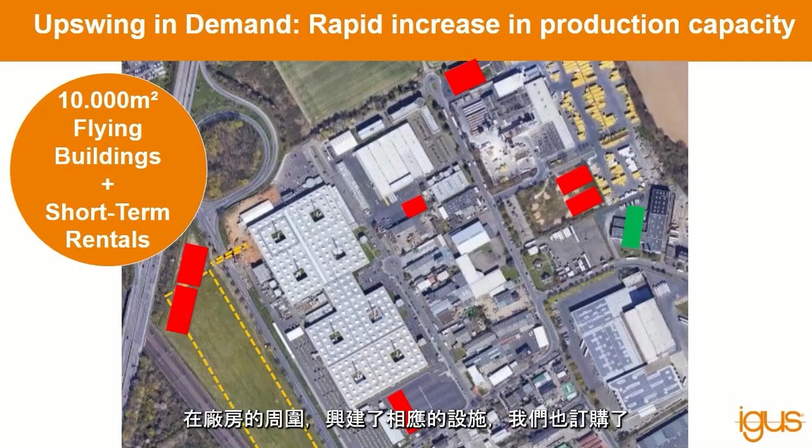We are experiencing a boom time right now, and we are ramping up our production capacities by 50%. We are building, as we speak, this new factory with 24,000 square meters. We are renting, in the meantime, rental facilities all around our building. We are pitching flying buildings to cope with it. We have ordered 330 injection molding machines, and almost 100 are running already.

We also increased our stocks towards the end of last year, which helped us immediately to deal with the quick demand. We hired more than 250 associates in our plants in Germany, and we have a plan to hire 220 more, and improved our training.

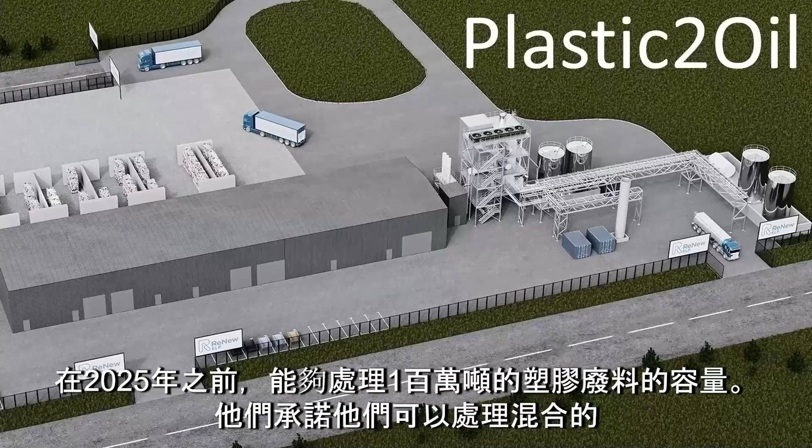And Mura now has the plan to ramp up the capacity to 1 million tons of plastic waste by the end of 2025. They promise they can take mixed plastic waste and turn it back into oil, naphtha, and other precious chemicals. The first installation is under construction now in England, and we are happy that we were present at the birth, and let's hope that this technology works on a large scale.

The second example, going from large global to very small. As you're probably aware, we have this apprentice system in Germany, young apprentices, and we thought, what is the best way that apprentices can learn? And the best way is that they run a company. So we gave them the chance to run a company, and they selected their own product.

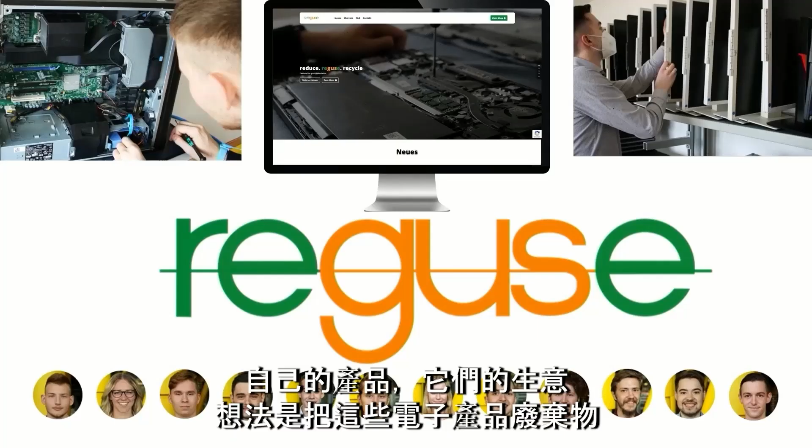Their business idea is to take electric and electronic waste from igus, refurbish it, and sell it online to igus associates and their families. They are refurbishing used laptops, monitors, keyboards, projectors, copiers, etc. They started online April 1st.

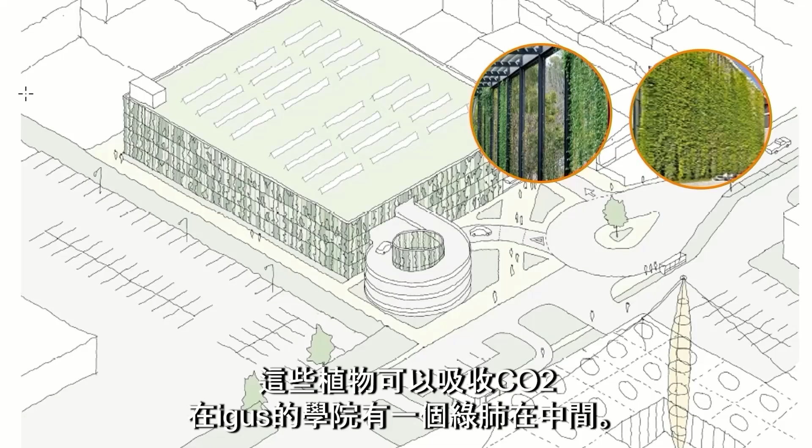The third example is that we are on track to measure and monitor our own CO2 footprint for our buildings, facilities, production, and products. Our goal is to be climate neutral with our buildings and production by 2025. One example is a parking garage we are planning on campus, with green planted facades to absorb CO2 and create a green lung in the middle of the igus campus, maybe with solar panels or gardens on the roof, also for company and customer events.

These are some of the initiatives we are taking. We do think plastic is a precious material. There's a young organization in the Netherlands called Precious Plastics, and we agree, if we do the circular thing right. There are still problems to be solved, such as microabrasion and fossil fuel dependencies. We are aware of that, and our suppliers and we are researching it.

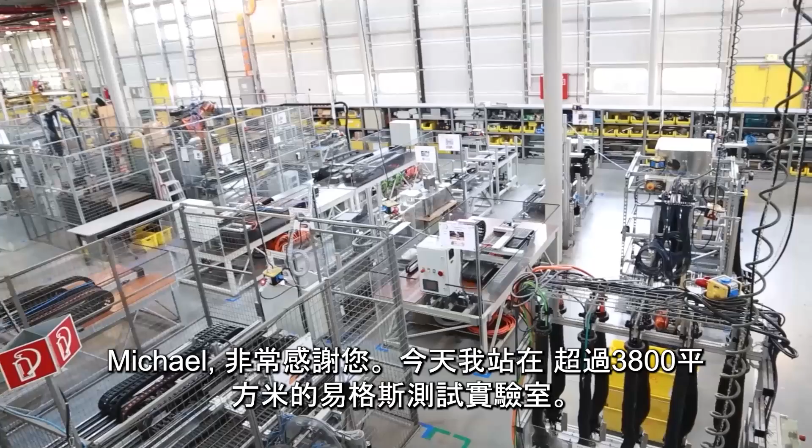Michael, thank you very much. Today I'm standing in the igus laboratory. With more than 3,800 square meters, we are doing more than 2 billion test cycles a year with chainflex cables and echains. And today I'm glad to present our newest investment, our laboratory for cleanroom tests.

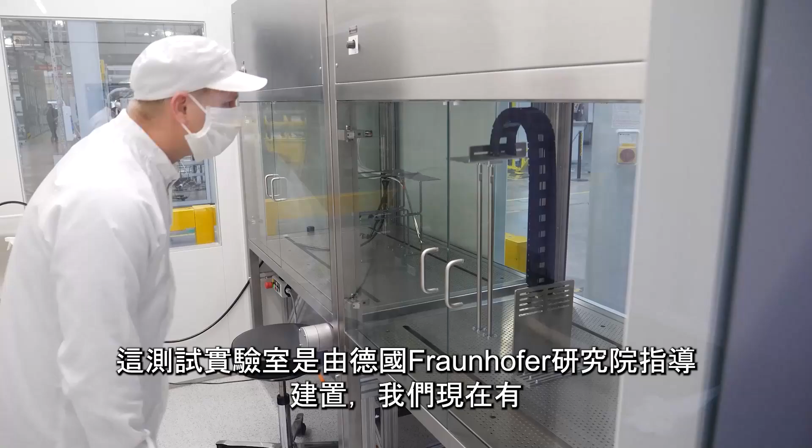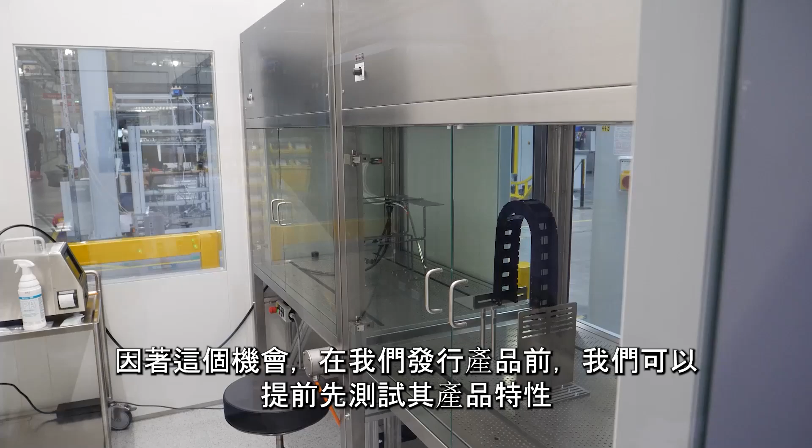This was built up with support from the Fraunhofer Institute Germany, and we now have the opportunity to do cleanroom tests according to ISO Class 1 with chainflex cables and echains. With this, we can test products before launching them into the market, and of course Fraunhofer Institute does the final testing. We want to present all the news we've tested in our laboratory at our booth. Michael, could you take over, please?

Okay, Rainer, thank you very much. Clean room, a very good keyword for Jörg. He will show us the complete new echain family E6 for the semiconductor and electronic industry. Jörg, please. Hello and welcome from my side as well.

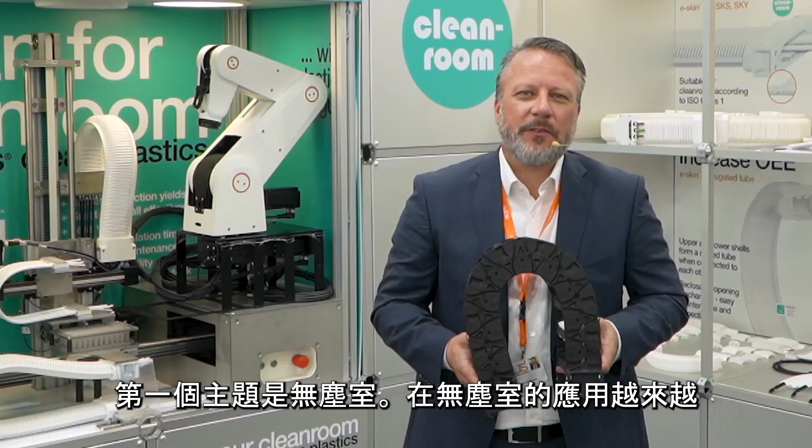The first topic is clean room. Applications in the clean room sector are becoming more and more demanding. The main markets are in Asia, in PCB assembly, medical technology, as well as display production. The demands on production for the clean room are always becoming greater: minimum particles, minimum contamination, and maximum service life with high dynamic values must be realized safely.

In order to be prepared for the future, we have developed a new cleanroom product, the C6 echain. C stands for clean, 6 for a 6-piece chain link. What makes the new C6 cleanroom chain stand out?

In the run-up to development, we took a close look at all the technical details of the previous series, E6 and E6.1, and optimized and redesigned them to new standards for cleanroom applications. The C6 has new bending connectors with better damping properties, less abrasion, and more lateral stability. Furthermore, we managed to design the side panels so that there is only a small gap between each other.

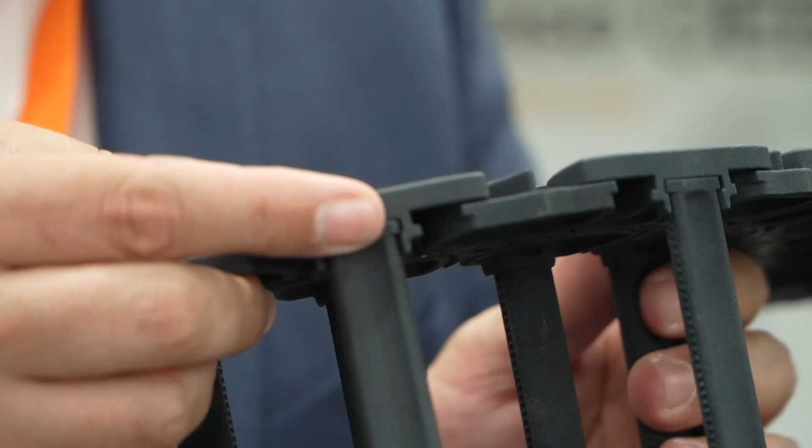This reduces the abrasion of the particles during operation to almost zero. In the outer area, we have integrated dampers which ensure low vibration, quiet operation, and reduce particle emissions. All components that come into contact with cables have been newly developed from tribo-optimized material, CR1.

With its abrasion-optimized design, the new C6 cleanroom echain is aiming for ISO class 1. The applications are medium travels with a high degree of filling inside.

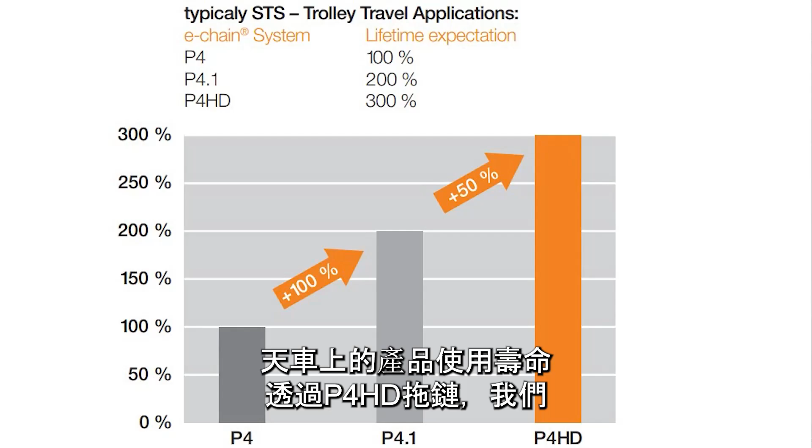Compared with the previous series P4 and P4.1, we doubled the service life and the availability of cranes, and now with the P4 HD we increase this lifetime again by 50%. This enables us to meet the demand of a service life of up to 15 years. We have achieved this with the following design improvements: new pin bore connections, even more abrasion-resistant materials,

a three-way stop system combined with a new symmetric design, optimized rollers, and a new autoglide crossbar. The chain is like a modular system. It is possible to quickly replace components without disassembling the chain.

Of course, the chain can also be used for other applications such as gantry handlings, whenever there is a combination of extremely high acceleration and long travels.

If desired, the chain can be equipped with our iSense modules for predictive maintenance service, live calculation, and other safety functions, making it easy for operators to monitor the chain online. Richard Habering will show you later more possible applications and solutions with smart plastics. Okay, I hand over again to Jörg.

He will show you now the world innovation TRX system for the robotic industry. Now, a world first for robotics.

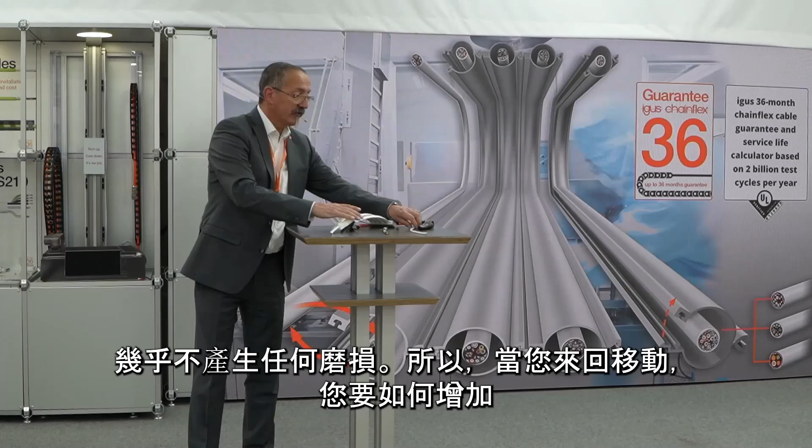When you're moving back and forth, how could they increase the speed of the application? When moving fast back and forth, there's always some force from the cables against this movement, and when you're bending the cable there's some force again. So we developed this chainflex clean family with a clear target.

One target is to reduce the size of the cable. If you look at a normal control or motor cable from igus for a normal e-chain application, you see the outer jacket and assembly shield. In the case of chainflex clean, we don't use any jacket anymore.

With the following clear benefits: we're able to reduce the weight by 21% and reduce the size by 18%. But the main benefit of this taped assembly of chainflex clean is that we have absolutely no force against its flexing, compared to jacketed cables.

With this benefit, tested with more than 50 million cycles for a bending radius of 70 millimeters, we have the full range of cables: control cable, bus cable, and motor cables. And, unique in the market, with a 36 month chainflex guarantee and UL verification.

I hope these news of chainflex and readychain were interesting for you, and I'm handing over to Richard for smartplastics.

Thank you very much. Let's talk about Industry 4.0, condition monitoring, Internet of Things, cloud computing, predictive maintenance, artificial intelligence, machine learning, 5G, edge computing. And in real life? What is the guy with the helmet thinking about that?

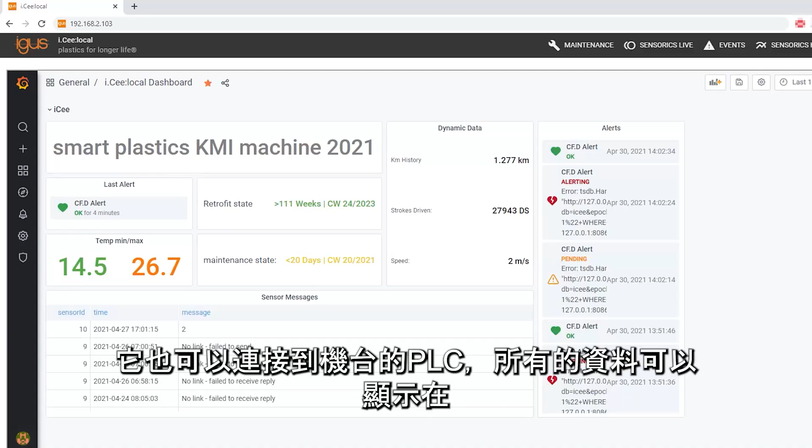It is possible to connect it with the PLC of the machine, so all the information can be given on the machine's monitor, and it can be connected with cloud computing services, MES, SCADA services, whatever. So the connectivity is no problem. We would like to say, yes, we can, if the question comes up, is it possible to connect to? So all these things reduce downtime, reduce stress, save money.

As we said, we did it for chains for more than 10 years now, and also for the bearings, solutions are available. But this is not my part. This you will hear a little bit later.

Thanks for your attention. Okay, new as well, we have the iSense 80mm size bearing new in the program for predictive maintenance, and it's especially for heavy duty applications. But what I want to present you today is the new and the second wrapped bearing, TX2, a special bearing for heavy duty applications. It is able to take loads up to 400 Newton per millimeter square, so it's a very heavy duty material.

And we have a standard program from 20 to 80 millimeter standard diameter, but it is possible to produce bearings up to 2.8 meters, so very, very big size. But the biggest advantage is the wear resistance. The wear resistance in pulsating applications is up to 3.5 times better than the TX1 we have in our program. So it's a very good solution for heavy duty applications.

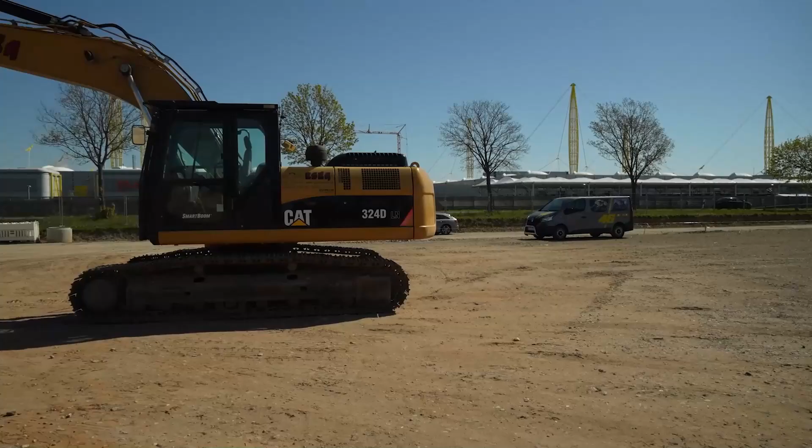But now I will show you a little bit more live from our construction field outside, very close to the igus factory. And now here from the construction site of igus, I want to explain to you why it makes sense to use maintenance-free bearings in all kinds of machines which need lubricated bearings for now.

There are three reasons. One is you save a lot of time for the maintaining of all these applications, and you reduce the downtime. Second, you save money because it's not necessary to put grease in the applications. For example, such a medium-sized construction machine needs 50 to 60 liters of grease every year.

And the third argument is that we save a lot of grease and oil which comes into our environment. Statistics say up to 27 million tons per year come into our environment. So these three arguments are not only good for the machines and for time and for money, they're also very, very good for our environment. A big step into an oil-free world. And the next news is for the food and beverage industry, our AX500.

And now from our industry and application corner, we go to the exhibition, the IMPS, the igus motionplastics show, and I want to explain to you more about the new AX500 here on this display. Yes, the new AX500 material, a new high performance material, with EU 10/2011 conformity and in combination ESD conformity.

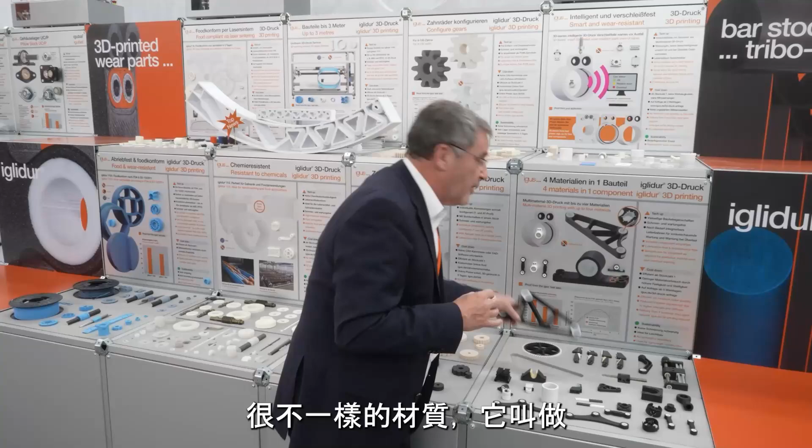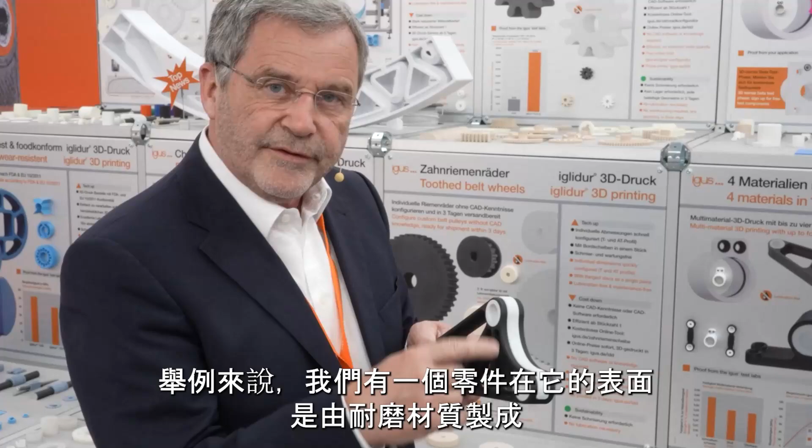Yes, that is indeed the very fast service, 3D printing, and different new materials. We developed a very interesting service for our customers. It's called the 4-key service, meaning that we are able to print from 4 different materials in just one piece. For instance, we have a surface made from a wear-resistant material. In the outer, we have a housing material with a very

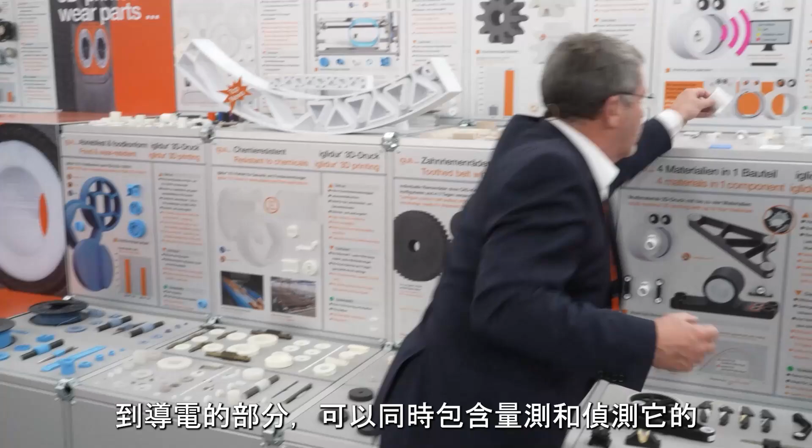strong hardness. And we can combine that with conductive parts, which are able to take a sensor in and measure and detect the wear or the loads on the bearing. And the last one, the fourth material, could be, for instance, a seal on the end of the bearing to keep dust and dirt out.

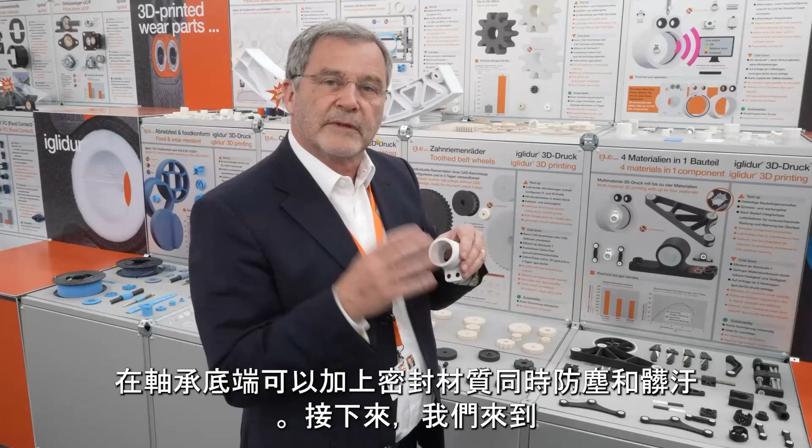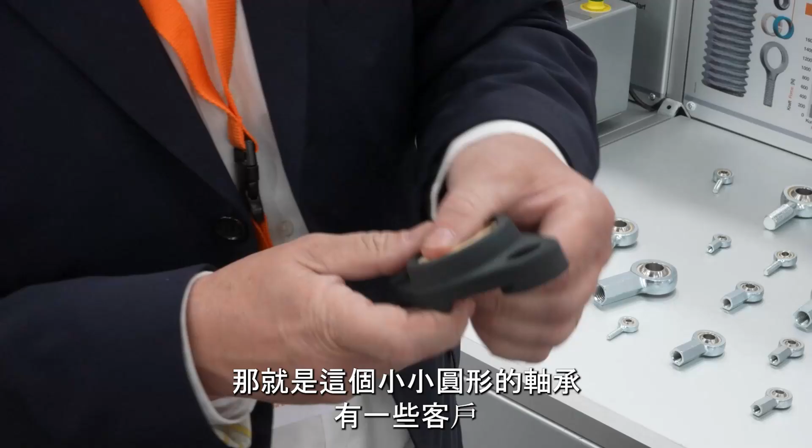Now we come over to the igubal parts, where we introduced a very interesting program of bearing inserts. That is these small round bearings in a spherical way. And some of our customers asked us also to make and offer the housings for these kinds of bearings. And it is clear for the reasons, because also the housings, when they are made from steel, will rust and have corrosion. Especially on the inside, that is a problem.

And so we developed a series of different housings, like these pedestal or flange bushings. In the last months, in the xiros department, we have made lots of very intensive tests to demonstrate how the material of the cage and the material of the outer and inner rings and the balls work together.

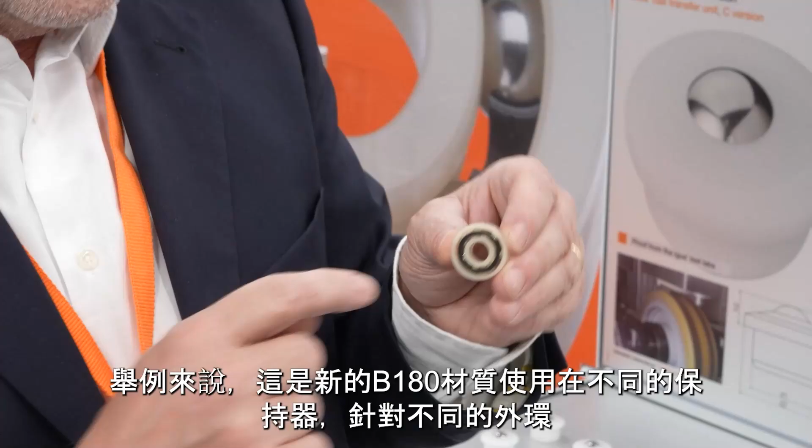And we found out and are finding out that the right combination will increase the lifetime of ball bearings by a very high factor. For instance, this is the new one, B180, which is using a different cage material to the outer and inner ring.

Very interesting, even for the Asian market, with all these electrical and electronic devices, we developed a new tribotape with ESD features. That means it is a conductive material that can be used with the glue on the outside or without the glue, and can be used in machines which have to handle electronic devices or components to keep them safe.

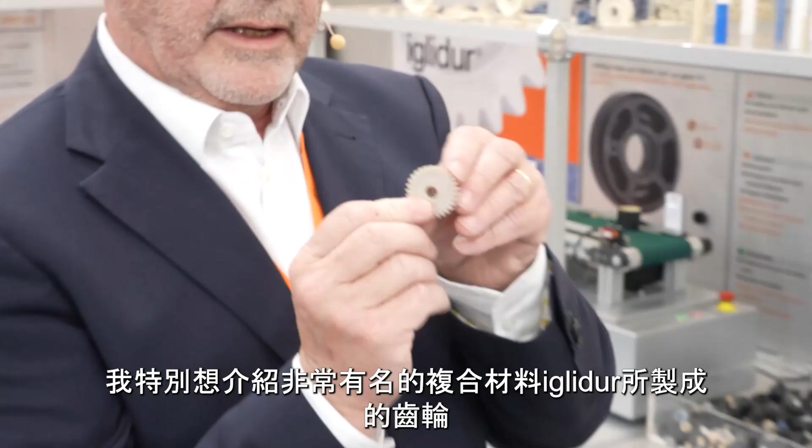And our last product I want to introduce to you is our gears. Gears made from plastic, and of course wear-resistant and lubrication-free gears. And what I want to introduce especially is gears made from our very well-known iglidur A500. Iglidur A500 is a high-temperature material with an FDA approval and with an extremely high chemical resistance.

Customers can buy standard types, or they can ask for very special parts which can be offered by igus made from iglidur A500. And gears are a very interesting product for my next colleague, Stefan Niermann, who is looking for these gears in his techniques.

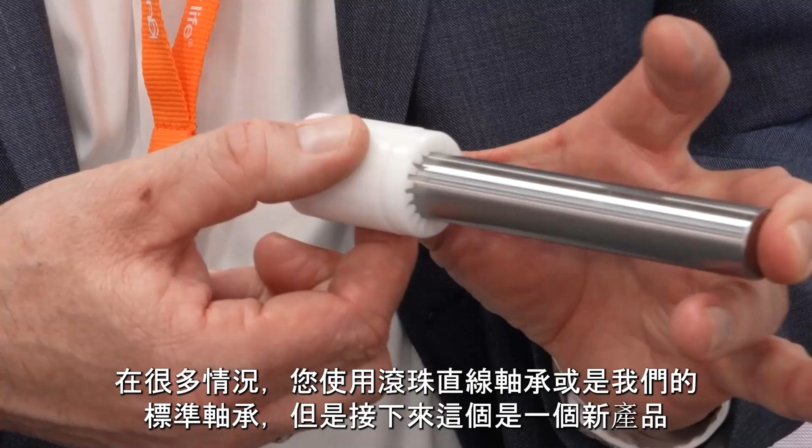Thank you, Gerhard, and welcome to the world of drylin, linear and drive technology. Linear technology, you move something from A to B on a direct way. In many cases, you use ball bearings or our standard bearings, but this one is a new and special one. This is made from 100% FDA compliant material. It's called A180, and the special thing of FDA, you can put it in direct contact with food.

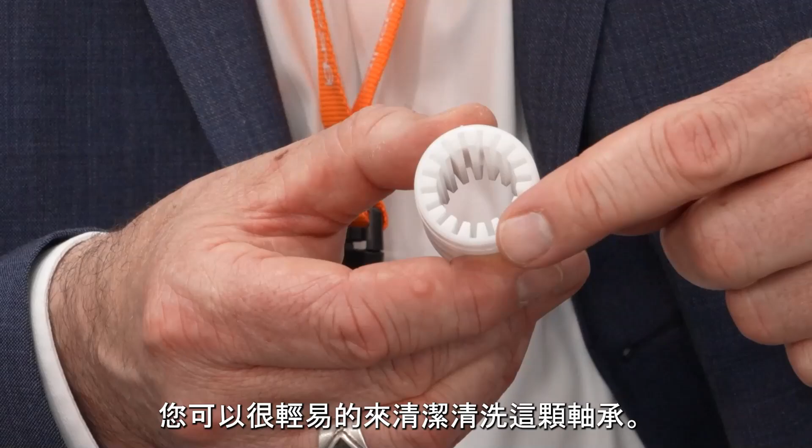And that gives us a new chance to sell this nice product to the food industry, but also to the medical industry, for example. And another nice feature of this bearing is you see the big grooves inside. You can really wash down these bearings very easily.

Another new product that was made for the linear market is the PS series. This one is made for high precision applications. High precision in our case means 20 microns of tolerance range. At the end you can reach 50% better play at the working point, because this is really molded very precisely, and it's also very stiff because of the small wall thickness and the material we use, W3600, with a high compressive strength.

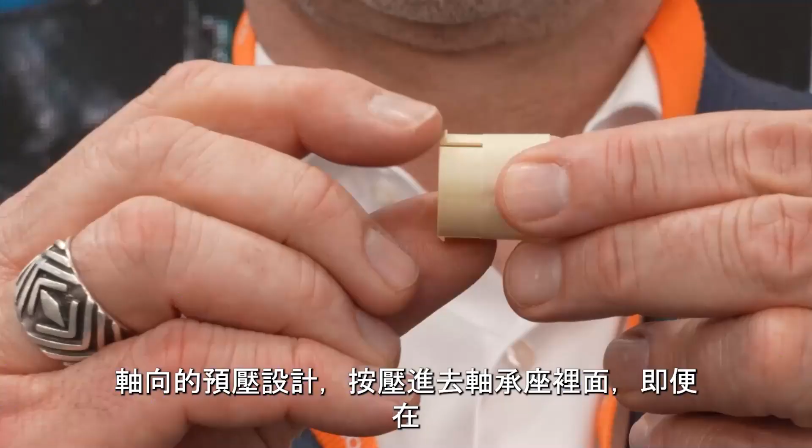And both together, thin wall and high compressive strength in a bearing like this, you can fix it, and you see that this axial, preloaded axial snapper gets into a groove inside of the housing, and so even for high temperature or high loads, you cannot lose the plastic out of the housing.

Yeah, specially made for applications where you need high precision, for example in medical or optical industry, like you see here, but also for some simple format adjustments where high precision is needed. So we talk about 20 microns. Maybe it's interesting for you.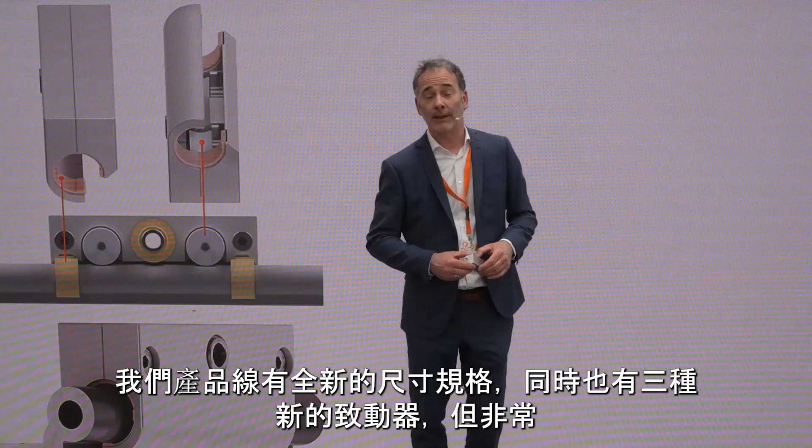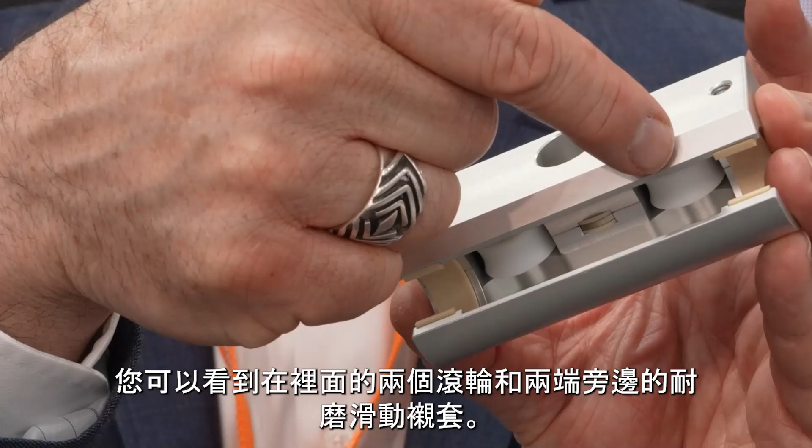Maybe you know our drylin W linear toolkit based on rails like this. We have a new size in our product range and also 3 new linear actuators, but the very special thing is our new roller bearing. Look at this bearing. You see 2 rollers inside and some sliding elements on the back. Where is it made for?

We are often asked for high load applications, and our rollers are not big enough, so we double the rollers now and can take double the load, or maybe reach double the lifetime. But if you have different rollers in a row or in line, then you have to make sure that all the rollers can take the load. And this is a special thing.

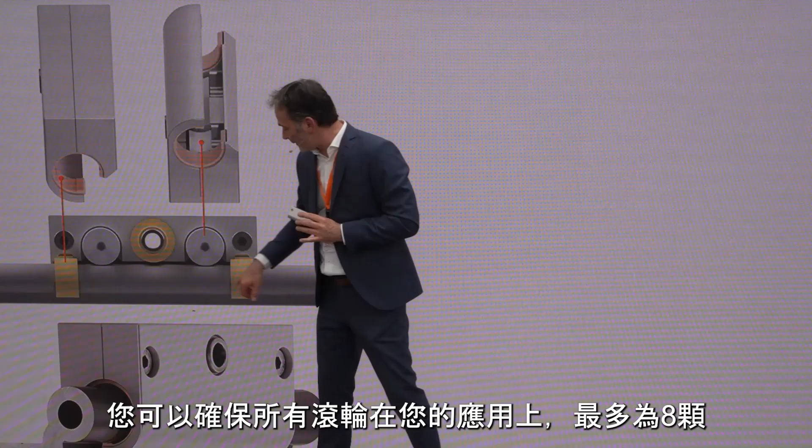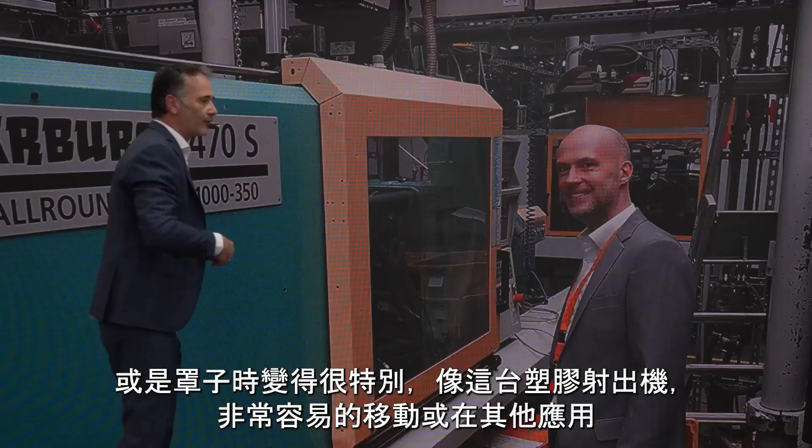You fix the housing here. You can see it here. You fix it here, and it can go like this, and you have a guarantee that all rollers that are in your application, maximum 8, can take the load. And that makes it really special for applications where you have to move big doors or shelters for machines, like here on a molding machine, very easy.

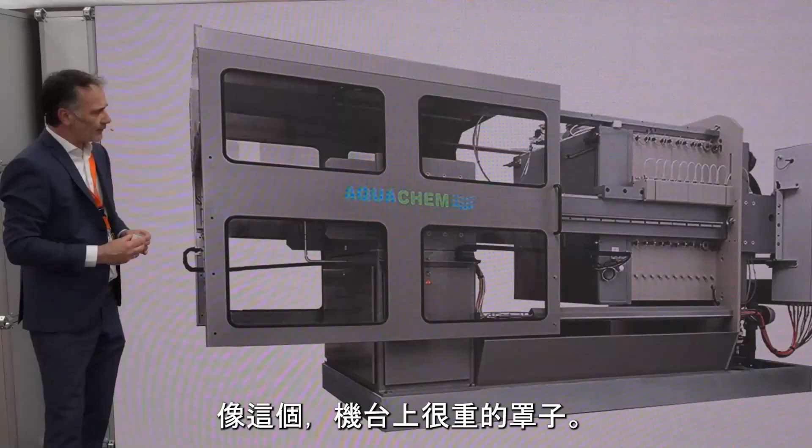Or in other applications like this one, a very heavy cover of a machine. This bearing can take 100 kilograms. So together 4 bearings can take 400 kilograms, and you cannot lose the bearing from the rail.

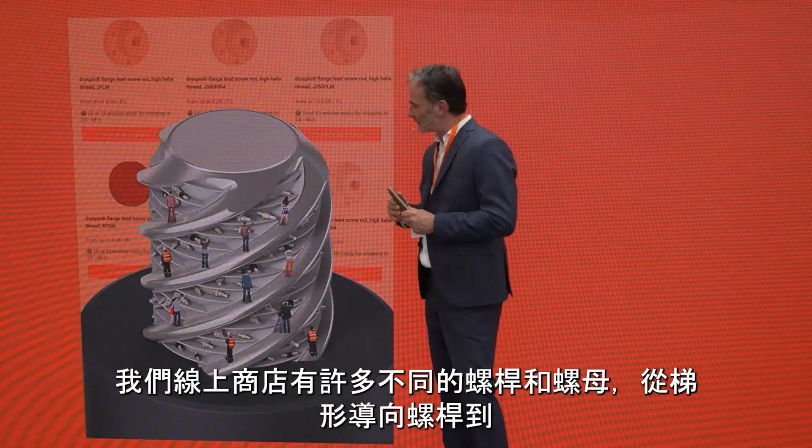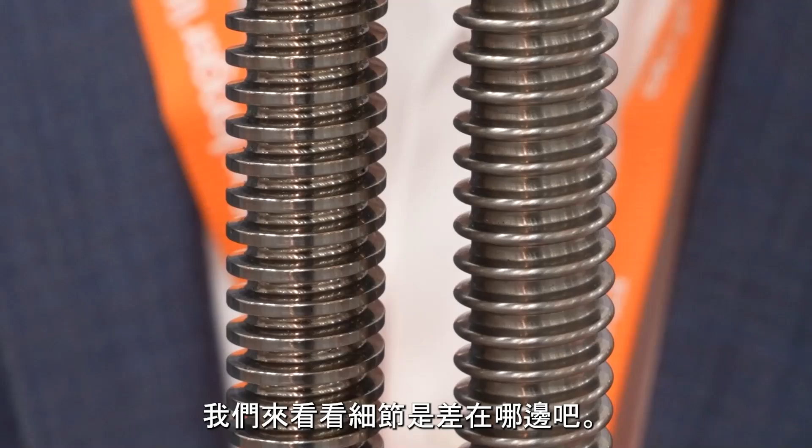Let's enter the world of our dryspin lead screw drives, or better, let's enter our dryspin shop. We have lots of different lead screws and nuts in our online shop, from trapezoidal to high helix and so on. And now we have something new, and these both look similar, but there's a big difference, and see what the difference is in detail.

The DIN, the German industry standard, has defined trapezoidal lead screws for more than 100 years, and it always works well, especially with metal nuts. We are working with plastic nuts, so we thought about putting some knowledge into the lead screws and changed the German industry standard a little bit. And let's have a look at the metamorphosis of this lead screw.

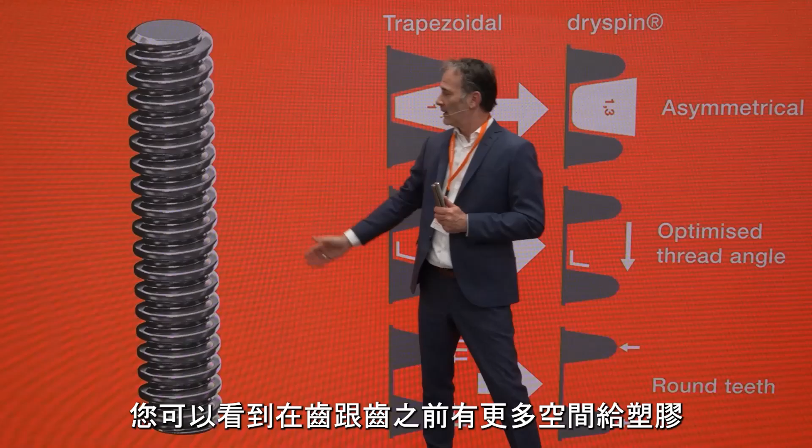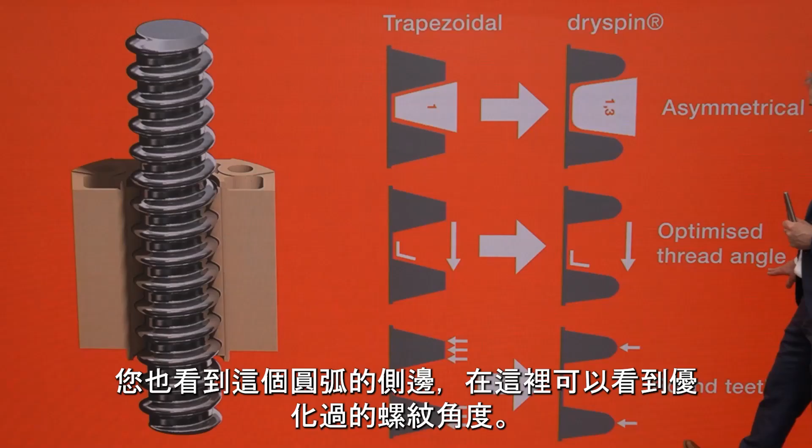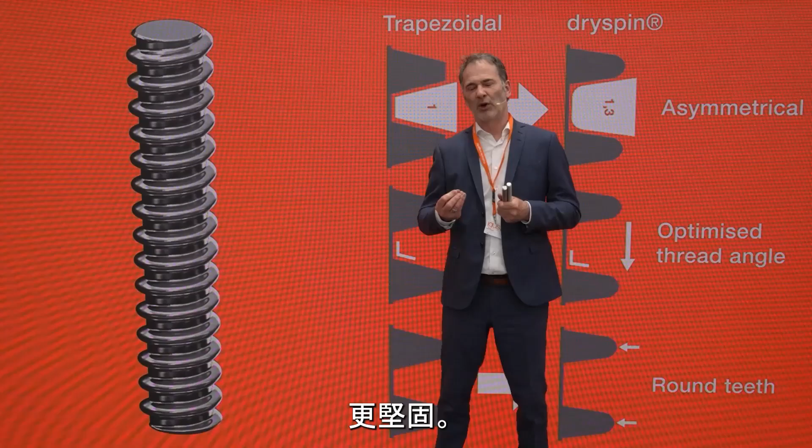And you can see that you have more place for the plastic between the teeth. You also have rounded flanks, and you can see it here, an optimized thread angle too. At the end you also have a bigger core inside, and this makes this lead screw more stable and more solid. And what is the advantage for the customer and for you?

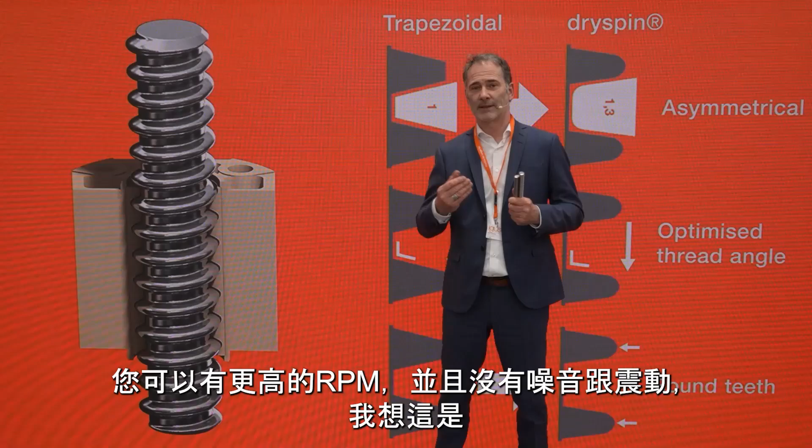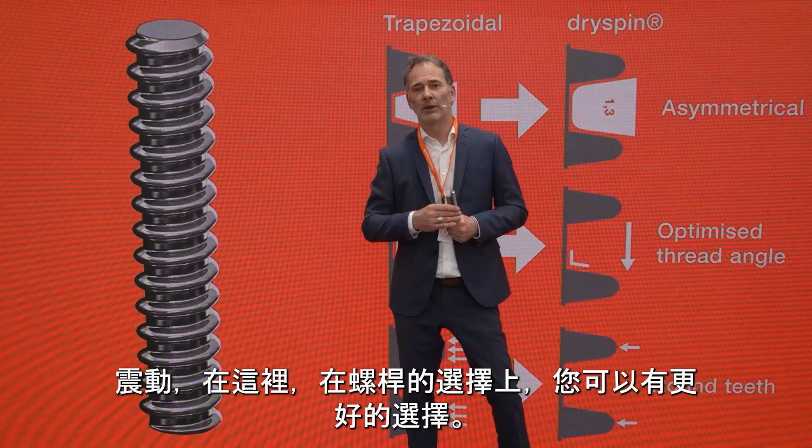You can run with higher RPM without getting noise or vibrations. And I think this is something that everybody knows. Trapezoidal lead screws like to make some noise, like to make vibrations, and here you can get a better result with the new lead screws. Cost down, tech up, for example, for 3D printers, for medical industry, optical industry, but also some simple format adjustments.

We are now leaving the world of motion in plastic and step into the world of electronics. And we have a lot of drive controls and motors, especially to drive our linear actuators. And especially for stepper motors, we now have a very cost-effective new driver.

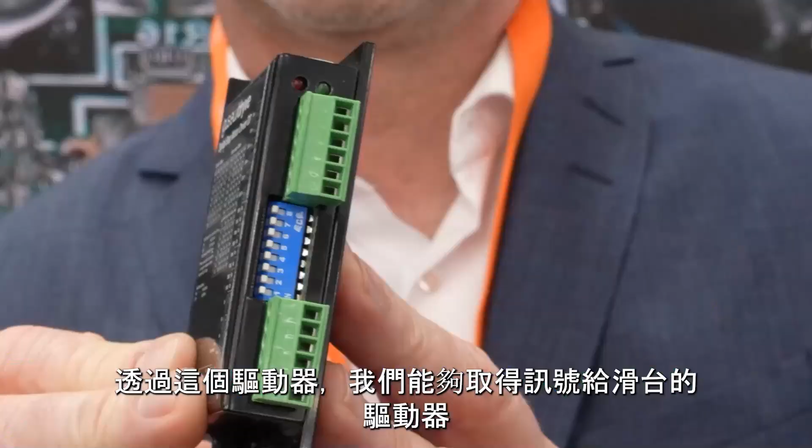And with this driver, we enable you to get signals to the linear actuator or to the motor very easily by Beckhoff or by Siemens, or even with the Arduino board or Raspberry Pi. That makes this cost-effective, and applications like open the door, close the door are really easy to realize. And for more stuff like automation and electronics, I pass over to Alex.

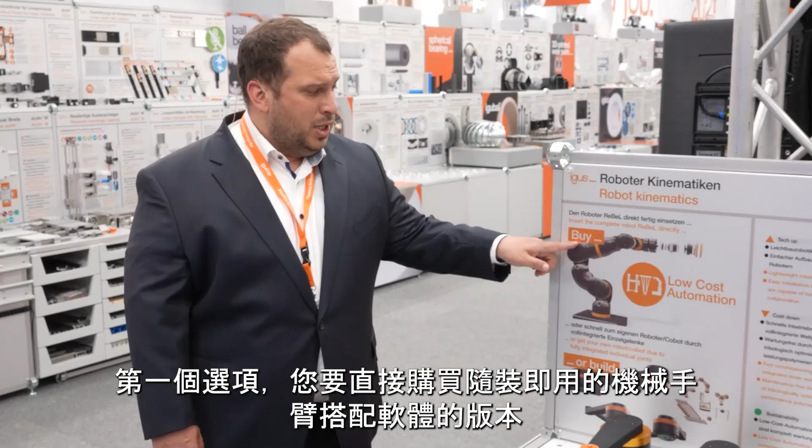We will come to the news, the ReBeL fully integrated wave gear and the ReBeL cobot. All our products always have two entry ideas. The one idea is buy a directly ready-to-use, plug and play version of a robot with software, with everything inside, so that you can directly start.

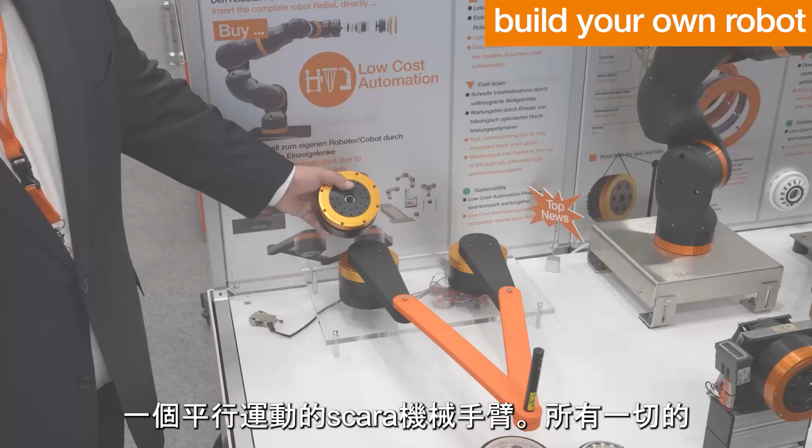And everything is driven by the CAN bus, a motor controller and BLDC, which is already fully integrated inside the wave gear. Here you can see the contrast, the variant of the ReBeL parts, the ReBeL articulated arm cobot. We think the lightest one in the world with under 10 kilograms weight, and from little quantities to have for 3,000 euros.

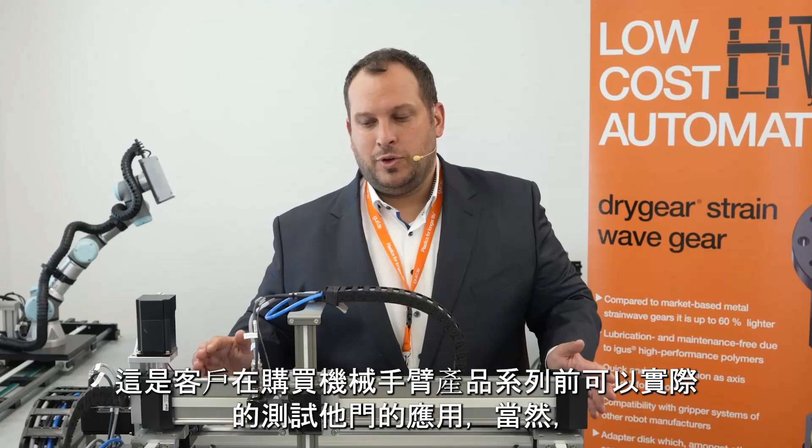Hello and welcome in our customer testing area. This is the area where customers can test before they invest in the robot kinematics. Of course, for integration, we are also using the igus robot control. The igus robot control on the one side is a free of cost, free software which can be used for all igus robot kinematics. On the other side, it's an affordable hardware, a product which can combine with all these kinematics.

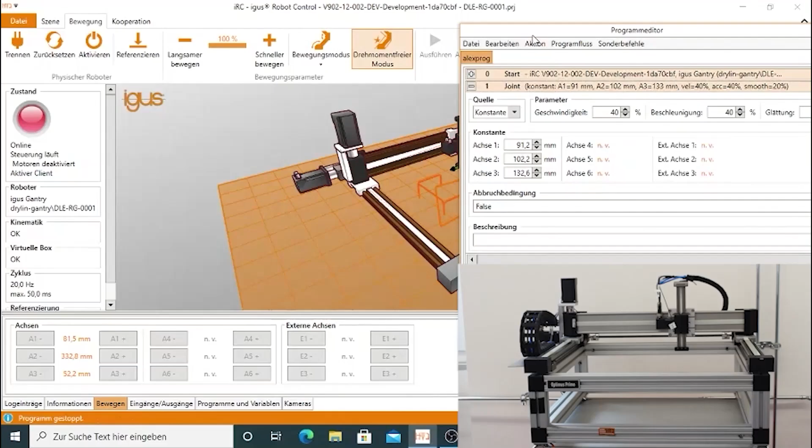Now we have got the topic RBTX. RBTX is our marketplace for low-cost robotics. We give you two promises. The first promise is that everything which you are collecting on the marketplace fits together. That means if you are collecting a gripper like this, we give you the guarantee that it fits the robot kinematics on the hardware and for sure also on the software side. And the second promise we give is the live price promise. You can directly check if it's still low cost for you or not.

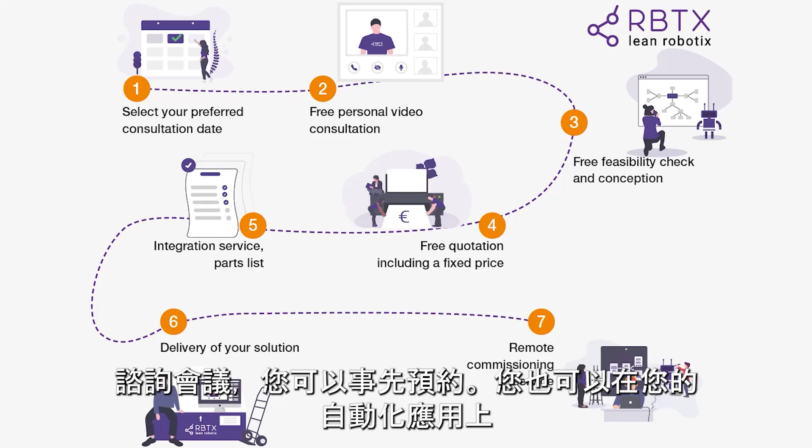As a new service, we have got the RBTX expert service on RBTX. That means a real live human integration remote meeting that you can book. You get advice, you get suggestions for your automation solution. Normally we speak about hardware cost between 3,000 and 25,000 euros and a maximum integration input of 100 hours.